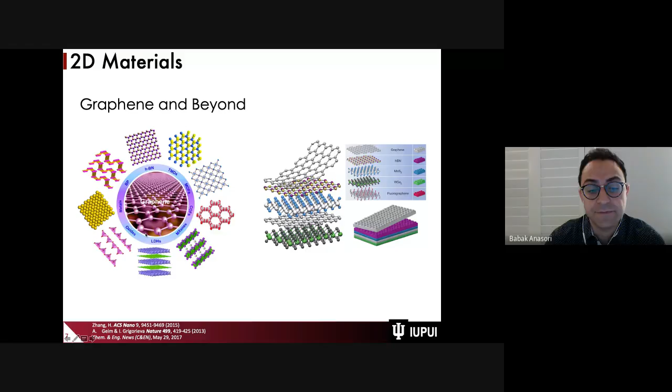MXenes are a family of two-dimensional transition metal carbides and nitrides. So they are basically atomic layers of a transition metal. I'm showing these schematics of the atomic structure of the MXenes, where we can have two layers.

Let me turn on my laser pointer. That might be better.

So there can be two layers of a transition metal, for example, titanium, with a layer of carbon in between, and on the outer surface, because we have transition metal and they have to satisfy all the electrons that they need to bond, we have surface termination.

Whatever is available in the environment, which is usually oxygen and humidity, forms oxygen and hydroxyl groups on the surface of these MXenes. So what is available on the surface is shown with this orangish yellow color, X represents carbon and nitrogen, which is gray, and M is the transition metal.

Now, you might ask, are transition metal carbides and nitrides something new? No. In the bulk form, it's not something new. They have been mostly introduced in the 20th century, and they are known as high temperature materials, ultra high temperature materials, which means that some of these can withstand very high temperatures, even up to 2000 degrees Celsius.

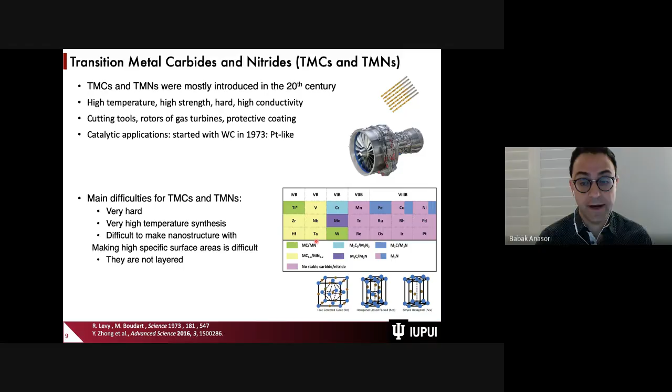Now, there has been much research going around to show that we can indeed make nanomaterials of transition metal carbides or nitrides. For example, making these cubes of molybdenum carbide at the nano scale, or making nanowires. Now, all of these are great, which is another step towards what we need to do for the advancement of technology.

But what if we can really benefit from almost every single atom or every layer of single atoms in the material? If we can use it at that level, then we can really pack more information, pack more energy, and control the properties, mechanical properties and physical properties at the atomic level.

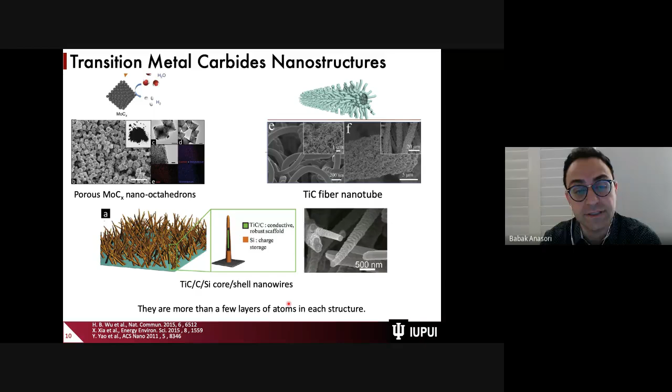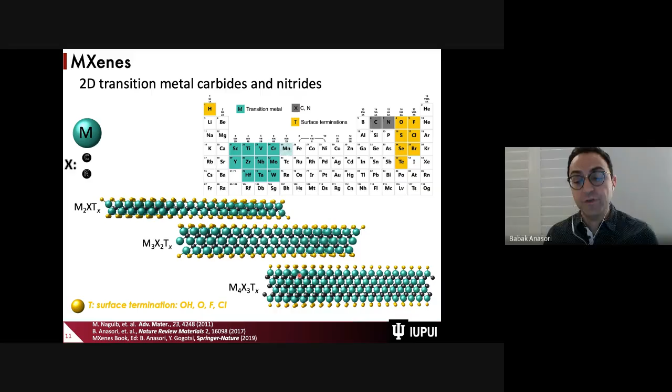And that's where we get to 2D transition metal carbides and nitrides, where we have the nanostructure really at the atomic level. We're talking about 2, 3, or 4 layers of a transition metal. So moving from bulk, now we are at the 2-dimensional transition metal carbides and nitrides.

Now, there are many papers, and this is an editorial that I wrote with Professor Yuri Gogotsi about the rise of MXenes that is available on ACS Nano. It is open access, so you can go and download it. It is only 3 pages, so you can get a quick background about MXenes.

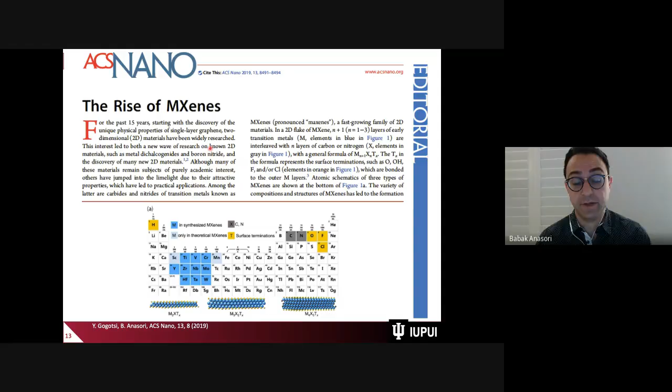With the MXenes and what is available in the whole chemistry, we can cover almost the entire periodic table, which is fascinating, which means that we can really tune the properties of the material at the atomic level by controlling what elements can go in between the layers, or what elements we can use in MXenes or in their precursors.

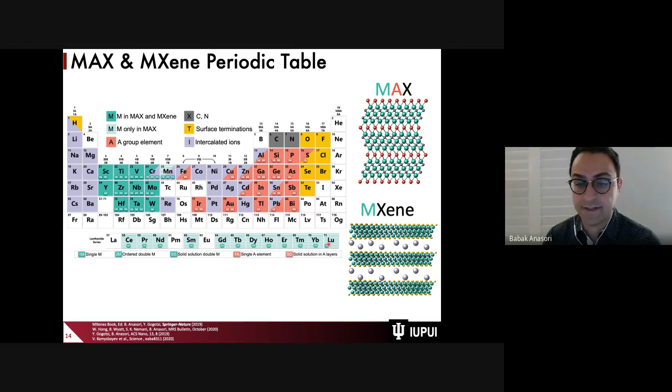Now, enough about the introduction. Let's get to MXene synthesis and then their properties. So to make MXenes, unlike many other 2D materials that you can grow at the atomic level, which is called bottom up, for the MXene synthesis we use a top-down method, which means that we start with the bulk structure, and then we break it down to smaller and smaller until we get to atomic layers.

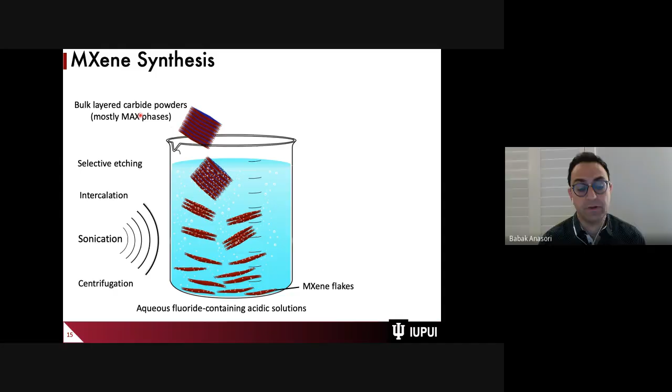Now, to do that, we need to do selective etching of layered materials that have extra elements in them, which are called MAX phases. Now, let's look at the precursor of MXenes. So to make MXene phases, first we start with the ternary carbide, which is called MAX phase. That means that they are similar to MXenes in terms of having this core of carbides, with 2, 3, or 4 layers of a transition metal with carbon or nitrogen.

Now, in the precursor of MXenes, we have an A element, which represents mostly group 13 to 15 of the periodic table, all the red elements in the periodic table, that bond the carbide layers together. Now, this bond is strong. It's a combination of metallic and covalent bonding, and it creates a very strong bond that we cannot really use Scotch tape to break down. For that, we need to go to selective etching that I will show in a minute.

Now, how do we make these precursors? To make the MAX phases, we use elemental powder. For example, if we are going to make Ti3AlC2, the structure of a ternary carbide, we can mix a stoichiometric ratio of the 3 elements, titanium, aluminum, and carbon. For example, here we use 3 moles of titanium, almost 1 mole of aluminum, and 2 moles of carbon. And we mix them, for example, for 24 hours.

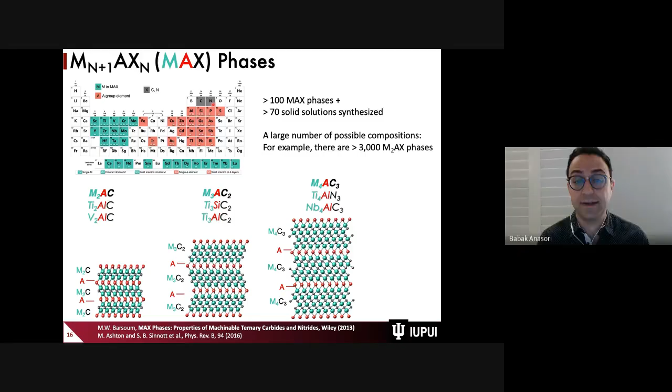After we make this material, we selectively remove that A layer that we added, for example, aluminum. You might ask, why do we add aluminum if we want to remove it? Because if we do not add these A elements, only using transition metal and carbon and nitrogen, we will get the regular transition metal carbides, which are not layered, and we cannot make the two-dimensional nano-layered structure. So by introducing the aluminum, we make this layered structure as a precursor for layered two-dimensional MXenes.

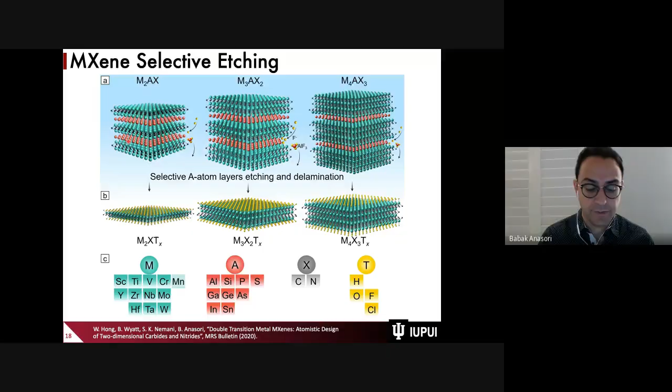After we make these, we remove the aluminum layers by selectively etching in hydrofluoric acid, and then we get the two-dimensional MXenes. So let me walk you through the structure using some microscopy. We have these bulk structures with the transition metal and this bonding. With the naked eye, the MAX phase, the precursor of MXene, is very similar to a carbide powder. It is grayish black, and this is just a photo of the powder. Under a microscope, it looks like any powder.

With a closer look under scanning electron microscopy, we see that it has a layered structure. Going even further with high resolution scanning transmission electron microscopy, we see the atomic layers here. Then by putting it into the etchant, which is mostly hydrofluoric acid or something that forms hydrofluoric acid, for example, a mixture of hydrochloric acid with lithium fluoride salt, it etches selectively only certain layers.

By removing aluminum from the structure, we get another grayish powder, but this time, instead of this bulk structure, we see a more open structure. And even at the atomic level, we see that they're all open, which means that we have these openings between the layers. And that's where we get to the two-dimensional.

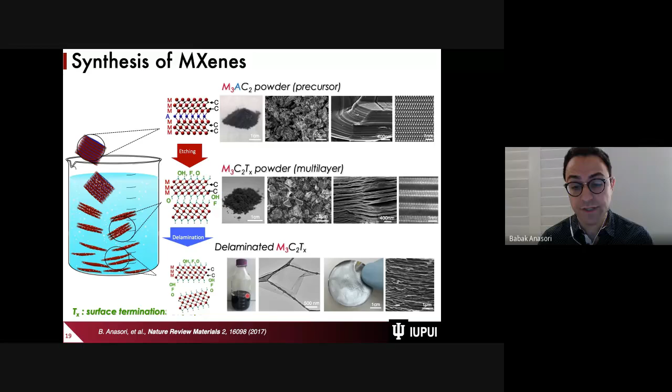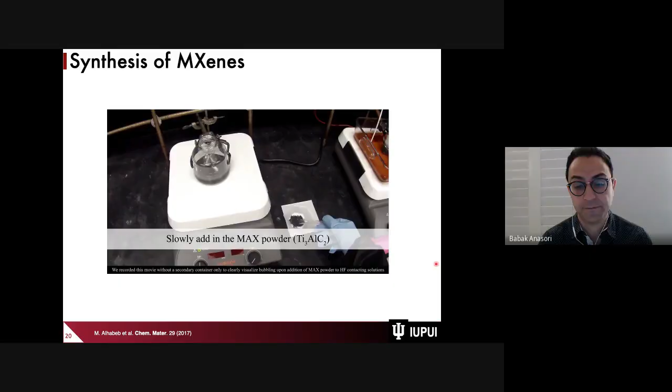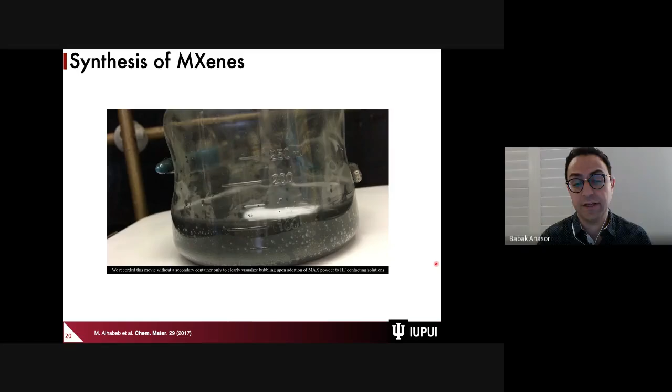Then we can collect these into a solution and make them into films or spray them. I hope that with this one video you can see how we make it. We have this gray powder that we put into a solvent, and then it will get selectively etched to remove the A element. So after we leave it in the etchant, we can have the single layers of MXenes.

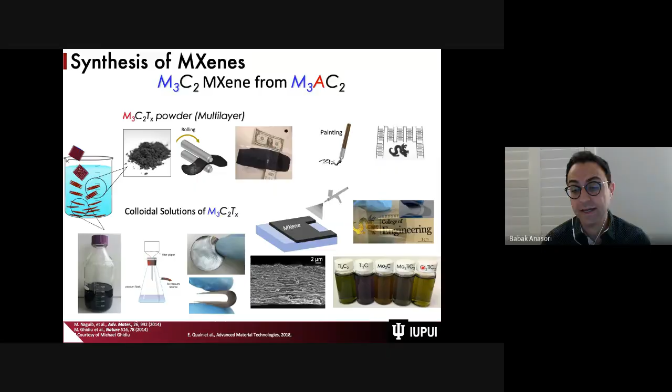These then we can roll into films, or we can spray onto different surfaces to make coverage of nanomaterials. We can use titanium, molybdenum, chromium, and when we dilute them, we have different colors, so different optical properties. We can dissolve it into different solvents, which is very important, because when you make the nanomaterial, the next step is how you can make structures or coverage out of these nanomaterials.

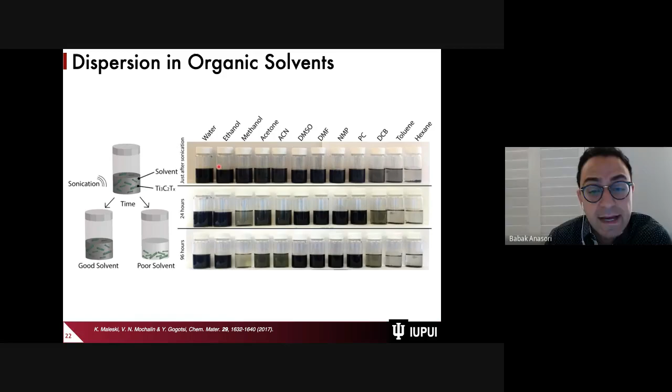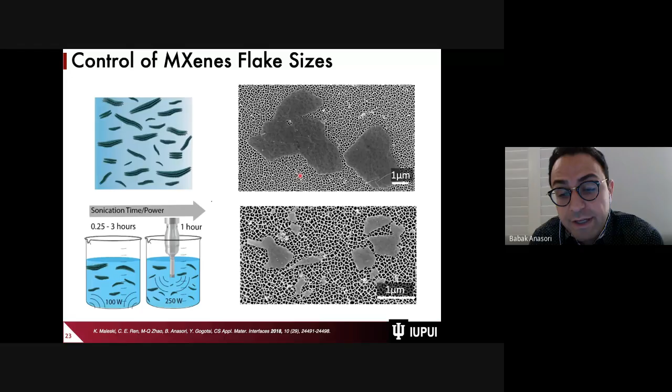And if they don't like to be dispersed in anything, more specifically, if they don't like water, meaning that they are hydrophobic, you will have a very hard time working with them, because they don't like to bond to any surfaces. But they are hydrophilic, they can easily get dispersed in water, and also different solvents like ethanol, acetone, and other organic solvents. We can control the single flake size, whether they are 5 or 10 microns, or very small, like a few hundred nanometers. And by that, we can control their properties as well.

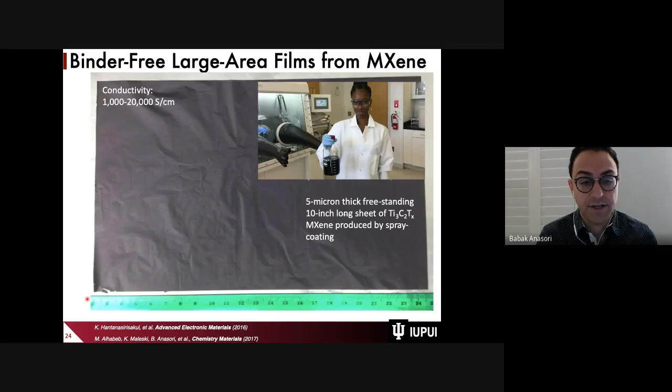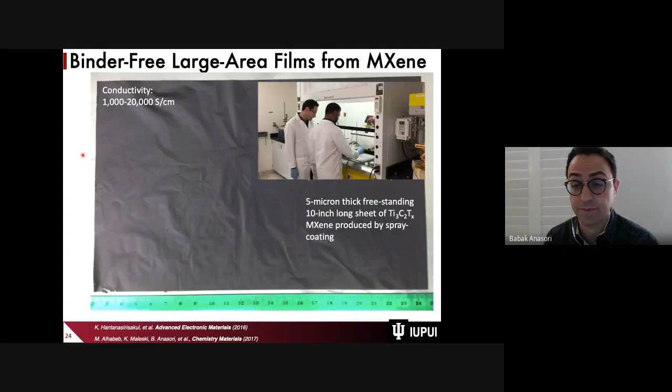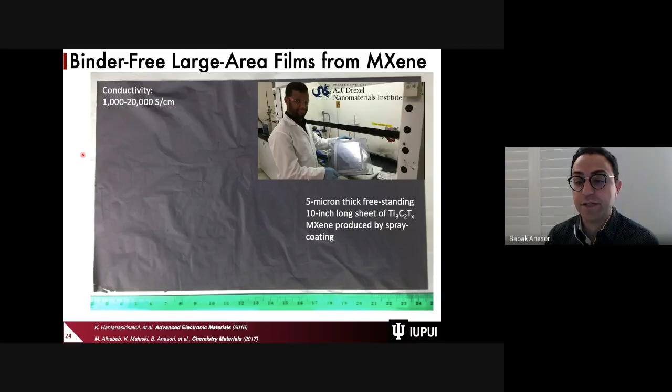Again, here is a paper size film that has been sprayed using this solution. And here's a movie showing how just by simple spraying, we can make these films. When we make it out of these nanostructures, they easily stick to the surfaces, and they give a very high conductivity of 1,000 to 20,000 Siemens per centimeter. I have to mention, all of this research has been done at Drexel Nanomaterials Institute, before I came to my current university, under the leadership of Professor Yury Gogotsi.

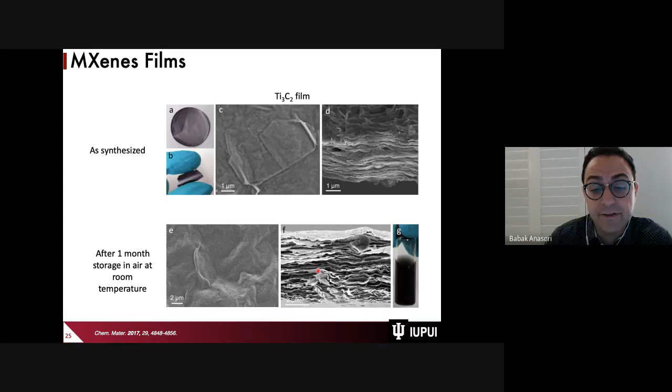Moving forward, we have these MXene films that we can synthesize, and as I said, they are single atomic or few atom layers, 1 nanometer thick layers. And obviously, like any transition metal carbide, they're expected to get oxidized, and they will get oxidized. But if we stack many of them over each other, the chances of oxidation reduce significantly, and they can live a lot longer in the environment.

Now, with all this synthesis, what we have is not only one element. For example, in graphene, what we have is a single element of carbon, and we can modify it and get outstanding properties. The unique feature of the family of MXenes is that we are not dealing with one element. We're dealing with 10, 11 transition metals in combination with carbon or nitrogen and surface terminations. We have a limitless number of compositions.

Now, in MXenes, we can have 2, 3, or 4 layers of, for example, titanium and carbon. So here it is Ti3C2, titanium and carbon. We can go one step further and use 2 different metals, for example, titanium and molybdenum, or titanium and vanadium. If you use titanium and vanadium, what we get is what we expect, which is alloys, a solid solution composition where we mix 2 elements like titanium and vanadium, and they form these mixed structures.

Another unique feature of MXenes is that when we mix certain transition metals, instead of forming solid solutions, they form ordered structures, meaning that one element, for example molybdenum, will go in the outer layers and titanium will go in the middle. So they form these atomic sandwiches at the 2D level of the carbide. Here we have only 4 layers of atoms with carbon in the interstitial sites, and these atomic sandwiches of molybdenum and titanium. We can even go one step further and have in-plane ordering, which means that within one plane of atoms we have ordering of different elements.

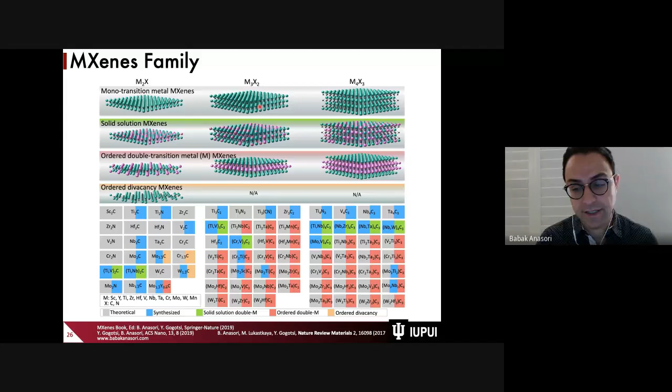So to wrap this part up, what we are looking at is a 1 nanometer thick sheet of transition metal that we can control the lateral sizes from few nanometers to few microns, and they have very high metallic conductivity, so they are very conductive, and at the single atomic layer they become even transparent because they only absorb 3% of visible light per 1 nanometer, which makes them transparent.

They can transport ions. That's why they have been used for energy storage application. They can adsorb different molecules on their surface. They love to bond to different molecules, so they can adsorb different molecules. They have hydrophilic surface, and they have a negative zeta potential, which means that the solution that we get when we have these single flakes in water, for example, it is stable.

So we don't need to shake it. So when we make the ink, we can spray it at any time. Because of the negative zeta potential, they're stable for a long time. And also they have high mechanical properties, high stiffness that I will talk about later on in my presentation today.

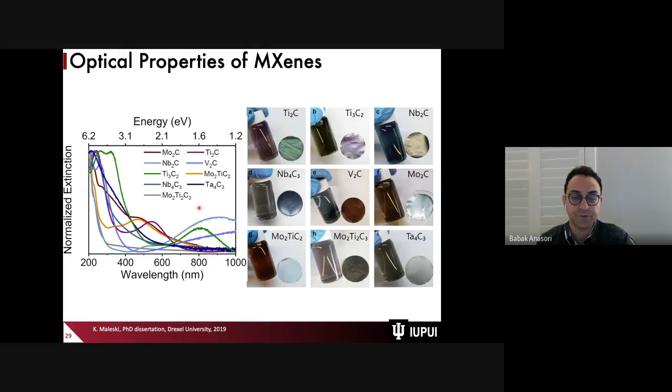So moving forward, optical properties. As I said, MXenes have a really large range of optical properties, which means that they can have different absorption peaks in the UV-Vis region, and they can be used for a variety of applications. For example, because of this, they have been used for cancer treatment, for photothermal therapy, which is another topic, and I don't want to get to biomedical because of the interest of the audience today.

So beyond optical or biomedical application, electromagnetic waves interaction. If you open our cell phones, we see all these black areas in the cell phone. One part which we take for granted is that many of these black areas are not really just plastic. They have some materials in them. It can be nanomaterials or carbon that prevent noise coming from one device or one component to another.

Because when we have electricity, when we have current, we know that we can create electromagnetic waves, and if it comes from one component, it can interfere with another one. So we need to encapsulate every component so that the electromagnetic waves do not come out and interfere. And that is something called electromagnetic interference shielding.

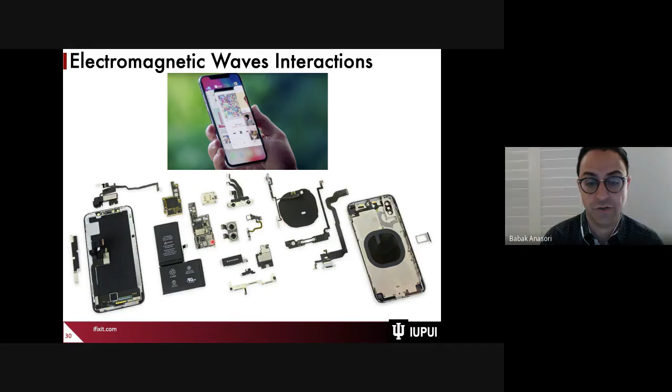In a paper that we published in 2016 at Drexel University in collaboration with KIST, Korea Institute of Science and Technology, we showed that MXenes and their polymer composites can outperform other materials in electromagnetic interference shielding. So by just using a solution of MXene that I talked about earlier, we have the nanomaterial in water, and then we spray it and make a film. Or we can mix it with polymer and make a film.

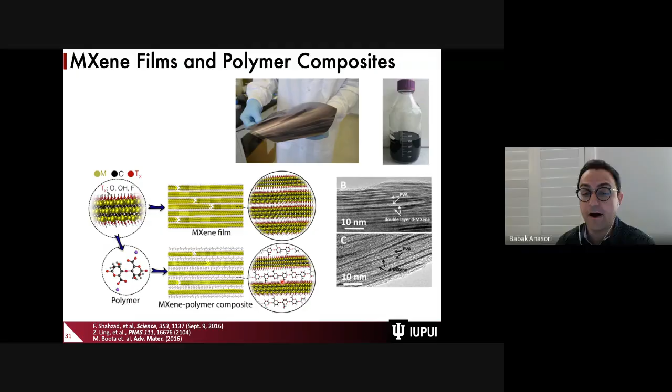So we see that, for example, here we have polymer in between the layers. By doing that, we can have a polymer MXene composite. We can control the mechanical properties and also make it more stable in environments. All these can be used for electromagnetic interference shielding. So we can use MXene in those black areas that I showed in the picture of the cell phone.

And we showed that by using MXene, we can get the same level as known metals, such as aluminum and copper, known as the best electromagnetic interference shielding materials. Now, the advantage here is that we are working with nanomaterial already available in solution, which is very important, which takes me to the beginning of the talk: if you want to get beyond the Internet of Things, we cannot simply use what has been available to us, for example, aluminum and copper in the bulk form.

Because if you use the bulk form, there's nothing wrong, but we can never get to the nano level, the invisible level, where we can have a cell phone smaller and smaller, or even devices integrated in our garments, in our clothes, or even in our bodies. So to get to the same level of performance, we need nanomaterials. And MXenes showed that they can outperform other nanomaterials and be at the same level. Very recently, Professor Gogotsi at Drexel University with the Korea Institute of Science and Technology showed that MXene can outperform even metals. So we are getting to outperforming any known material for electromagnetic interference shielding.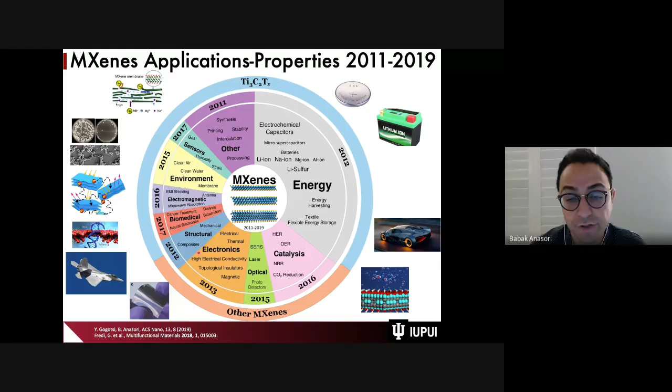So it means that we can explore novel composites and their properties, and not just to make a stronger body of the car. Because of all these properties that I mentioned, for example, high metallic conductivity and also the capability of storing energy, it's not only to make just a stronger body. These are all not related to MXene. These are all studies and different concepts from different car makers, where we can basically put the battery, for example, in the body of the car.

Imagine how much more energy we can store if we use the body, all the area of the car. Right now, for example, if you look at an electric car, we have the battery, and then we have the rest of the car. Now imagine that we integrate everything together, so that the rest of the car is also where we can store energy. Just imagine how much more distance we can drive with a car if we turn everything we can, for example, all the unused body, under the hood, or in the trunk, into the battery part of the car.

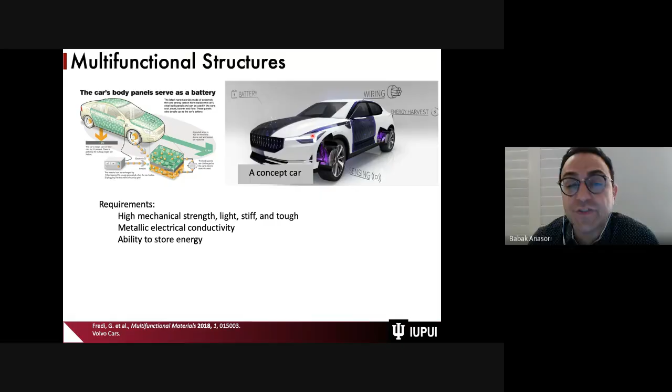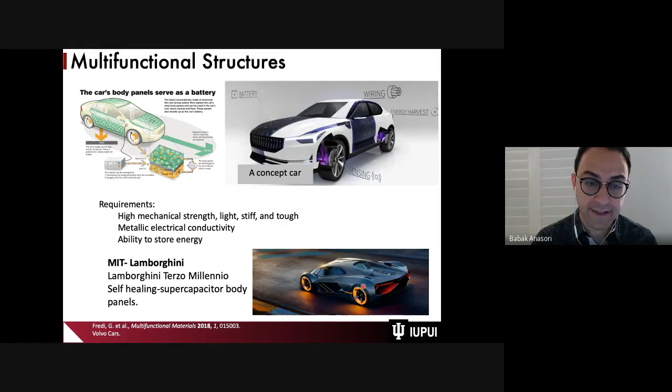To take it to that level, we need nanomaterials that are multifunctional. They're strong, and at the same time they can store energy. And storing energy in the battery means that they can have ions going in and coming out. And there are many concept cars, and there are even some, for example, MIT and Lamborghini, exploring using carbon-reinforced bodies of the car for energy storage in the body. So there are concepts and there is some research, and we believe MXene can be one of the nanomaterial candidates for this application. So more on the mechanical properties.

So as a transition metal carbide, MXenes have very high stiffness. The stiffness can be in the range of 300 to 400 gigapascal. If you look at all the known materials, the highest Young's modulus of all materials is for graphene, where we have 1000 gigapascal or 1 terapascal of Young's modulus. After that, we have hexagonal boron nitride. And right after that, we have MXenes. Now, these are all measured on a single atomic layer, a few atoms thick, of MXenes.

So this is done by using atomic force microscopy on a flake of MXene, in collaboration with our collaborators from Drexel and University of Nebraska, Lincoln. We really pushed one single layer of MXene to measure its two-dimensional modulus and convert it to Young's modulus by considering the thickness. And we found that MXenes are the third strongest material.

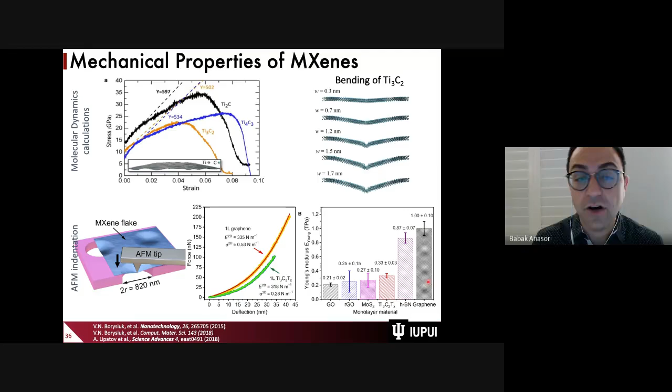And now one unique feature is that if you're looking at graphene and hexagonal boron nitride, these are the values that we can get only if we grow a single layer, which from a mechanical engineering perspective doesn't really help us, because we do not need just a single layer. We need a lot of material to put in the composite. So it is great to have this very high Young's modulus, but can we put it in our composites? The answer is no, because we only have a single layer. And also this is not even hydrophilic, so it has a very hard time getting bonded to other material. Now MXenes are the ones that we can make in large quantity.

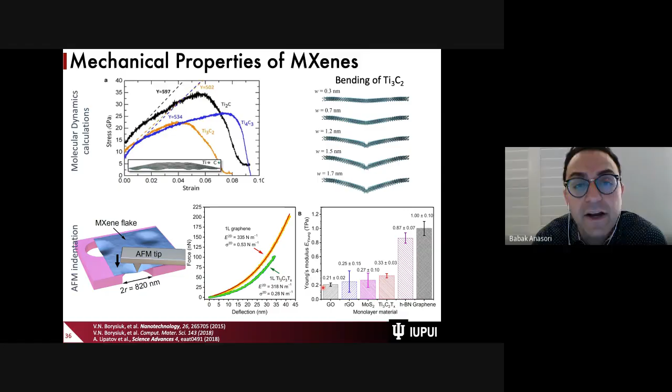It is very similar to graphene oxide or reduced graphene oxide, but if you look at the numbers, when we go from graphene to graphene oxide, we go from 1000 to 200 gigapascal. That's where MXene outperforms all other solution-processed 2D materials or nanomaterials that we can make in large scales, and they are hydrophilic, ready to bond. Also, even beyond, MXenes, by the nature of transition metal carbides, if they are in a controlled environment, are high temperature materials. So we can integrate them in metals, possibly in ceramics, and then use them for high temperature applications.

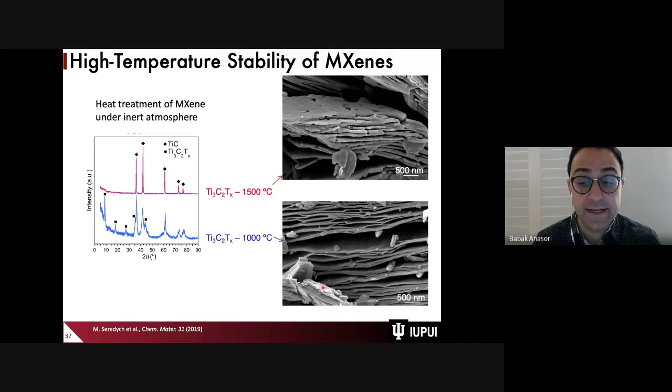Hello? So it was just a disturbance. Carry on, sir, please. I'm sorry, are you talking to me? Yes, sir. It was a disturbance. Okay, can you hear me now? Yes, sir. Okay, did you see this previous slide? Yes, sir. Okay, fine, all right. So please feel free to stop me if you do not hear me, because it's just the reality we are living in with virtual and internet. So feel free to stop me at any time needed.

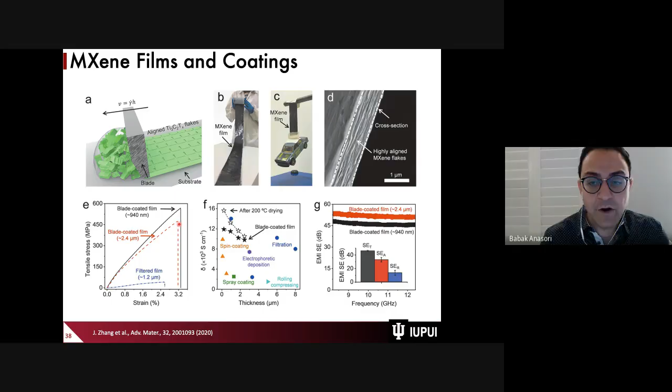So this is just pure MXene with which we get these outstanding mechanical properties. Now we can simply integrate MXenes in different composites. For example, we can make polymer MXene composites by just mixing.

So we have this solution of MXene, and we just mix it with polymers and make MXene polymer composites. Or we can make ceramic and metal MXene composites by mixing MXenes with metals or ceramics. This is an area that I believe has a lot of room for improvement, and very little has been done.

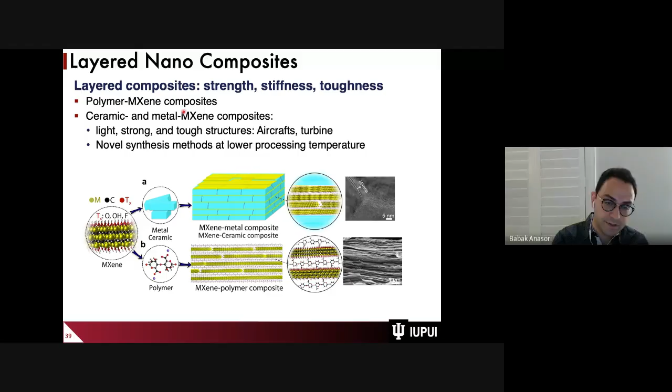For example, for ceramic MXene composites, this is research that we did at Drexel with collaborators at Pennsylvania State University, which showed that by mixing MXenes with zinc oxide, the 2D flakes of MXene will go to the grain boundaries of this oxide ceramic and cover and wrap around these zinc oxide particles.

Then by sintering at only 300 degrees C with 250 megapascals, we can get, so this is the relative density, almost to 100, or slightly less, like 96% dense composite. The other advantage is by wrapping these MXenes around the grains of the ceramic, we prevent grain growth. So we keep the grains a lot smaller, because we don't allow diffusion to happen by putting a MXene layer in between.

And here's a transmission electron microscopy image that shows that we can indeed put MXene flakes at the grain boundary. By doing that, we can improve hardness, and the modulus measured by nanoindentation also showed some improvement. So this is in ceramic composites. There are only very few papers on this topic, and there's a lot more room for improvement of MXene composites.

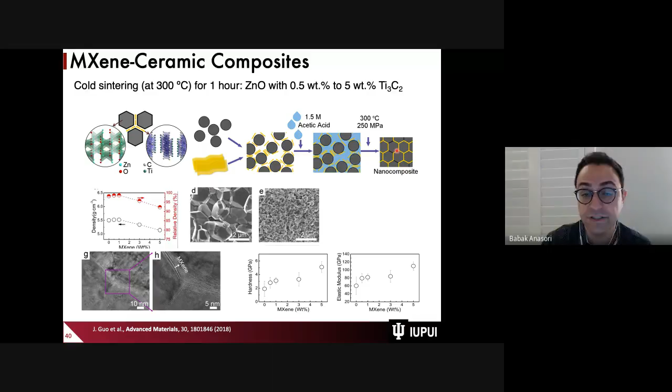And by having these layers, we can not only improve the strength, we can also improve toughness because of crack deflection. So we are combining all the benefits by using these MXenes instead of just adding particles and hoping that we can improve the strength of the material. And that's the area of composites more related to mechanical engineering.

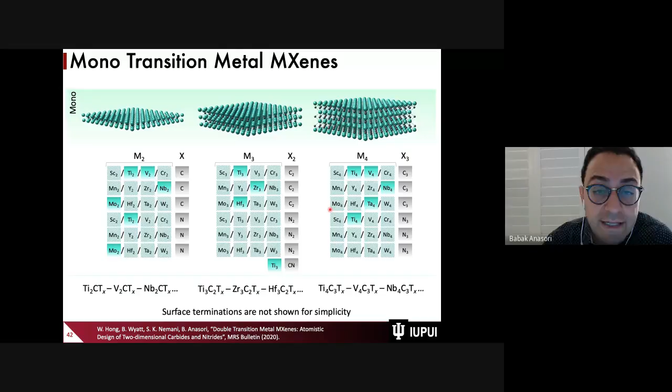The bottom line is we have a very large family of materials on which we've barely scratched the surface. The solid ones are the ones that have been synthesized. Just look at how many more possible compositions we can fabricate and have not fabricated yet. So there's a lot more room for improvement. When we consider alloys, solid solutions, we get a lot more possibilities.

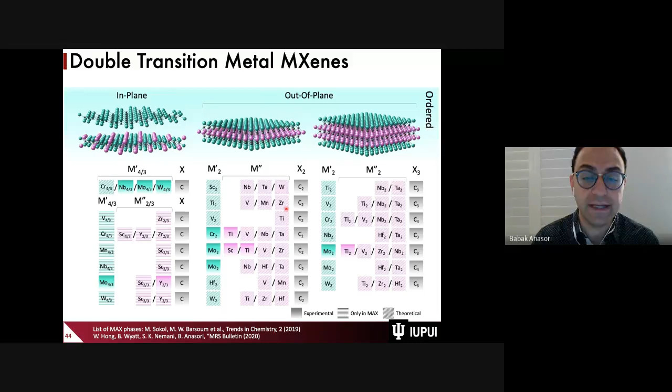Here, because we're dealing only with 4 layers, every change in composition will easily be visible in all the properties, including mechanical properties, energy storage, electrical properties, and others. And we can all work on this field and create what is needed for the future of our technology.